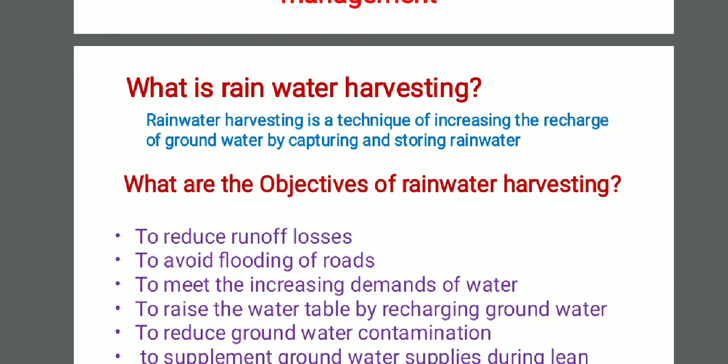Shall we proceed? Okay, first one, rainwater harvesting. This is a very important water harvesting technique. This method was practiced even 1000 years before. People used to collect the rainwater from the rooftop and stored this water in tanks.

Whenever they needed water, this rainwater was used for their purpose. You know, many places across the country receive abundant rainfall during rainy season, but they face water scarcity during the summer season.

Why? What is the problem for this? This is due to the poor rainwater management system. Unless and otherwise we properly manage the rainwater, the water scarcity problem could not be eliminated or reduced.

So this method is very important. Rainwater harvesting is very important to recharge the groundwater, because groundwater is used for many purposes: drinking purpose, irrigation purpose, industrial applications. All those works need groundwater. So this groundwater has to be recharged only through rainwater. If we establish rainwater harvesting structures, the groundwater would be effectively recharged and water scarcity problems could be minimized.

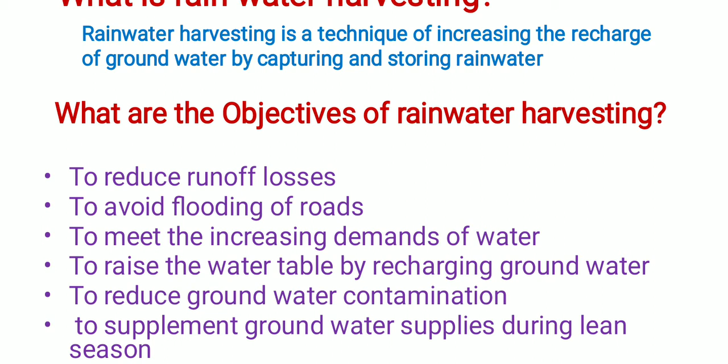Second objective, to avoid flooding of roads. Yes, you would have seen during rainy season water accumulated on the roads. This is due to poor infiltration capacity of the roads. Heavy vehicles moving on the road cause the soil to get compacted, so it has poor infiltration capacity, and water accumulates on the roads. That will disturb our routine.

When we do the rainwater harvesting, these problems can be minimized to meet the increasing demands of water. Yes, when we store the rainwater in overhead tanks or underground tanks, during water scarcity times this water can be used for our purpose.

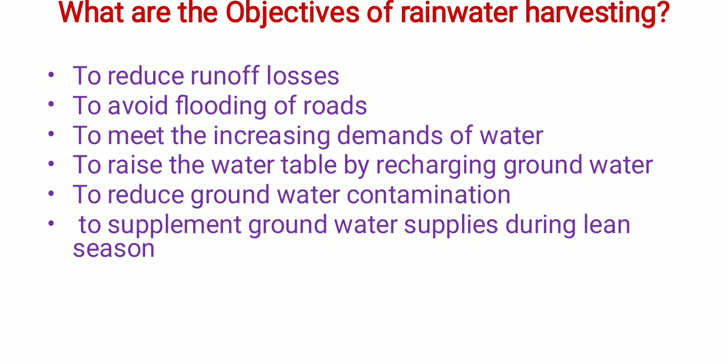Next, to raise the water table by recharging the groundwater - I have already explained this point, I don't want to tell it again. And to reduce groundwater contamination: yes, at the source itself we collect the rainwater. Rainwater is the purest form of water. When we collect it and make it infiltrate into the soil, groundwater pollution is minimized.

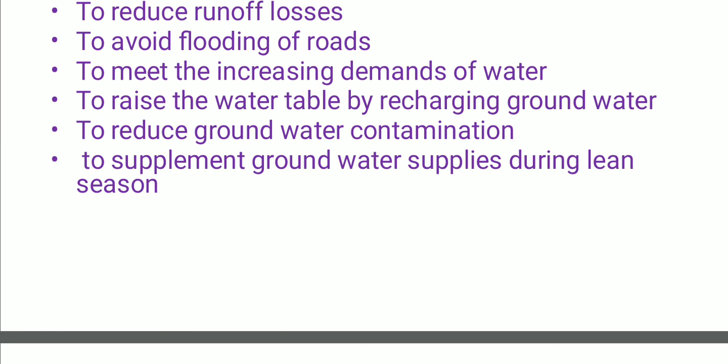When rainwater is allowed to flow over the surface, it will carry some pollutants. If we collect the purest water from the rooftop and directly pass this water into the soil, the pollution of groundwater can be reduced. To supplement the groundwater supplies during lean season, it can be used as a supplement. So these are the rainwater harvesting techniques.

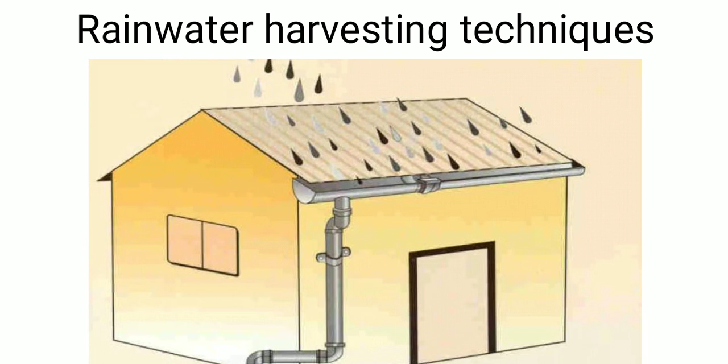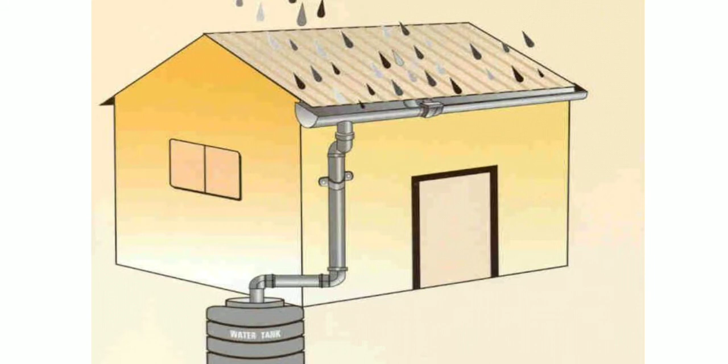So here, the rooftop water from the rooftop is collected and stored in the tank. Whenever we need water, or during water scarcity times, this water can be used. This is one of the methods.

Compared to this, the second method is widely practiced. Here, a portion of the water from the rooftop is diverted to the abandoned well, and another portion is diverted to rainwater harvesting structures. It is used to recharge the groundwater.

I know in 2006 or 7, the government of Tamil Nadu passed an order stating that all housing units, including commercial buildings, have to establish rainwater harvesting structures. If it is not established, the electricity supply and the water supply should be cut.

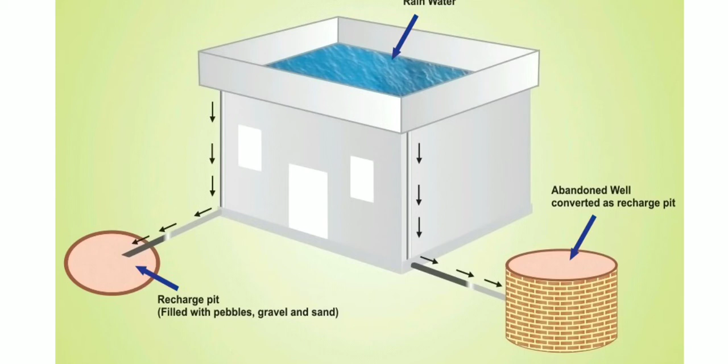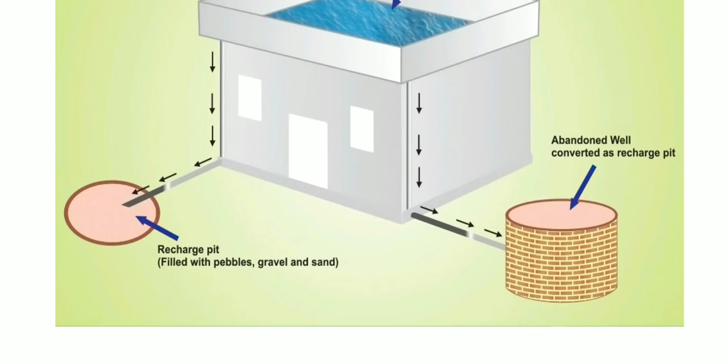So after this order, these rainwater harvesting structures have slowly been established by some commercial buildings, and even by many households.

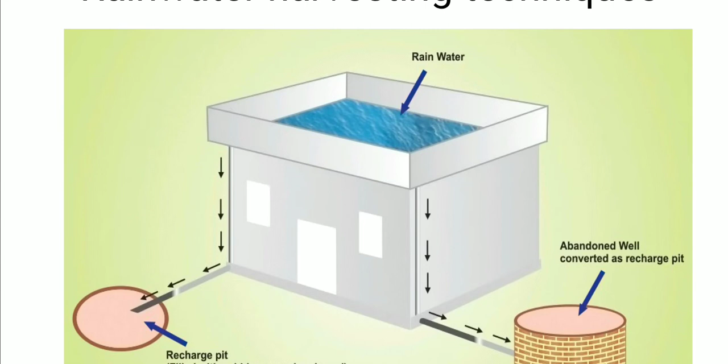So what must we do? My request is that everyone should concentrate on establishing a rainwater harvesting structure in your home. This would definitely help save our environment and reduce or eradicate water scarcity problems.

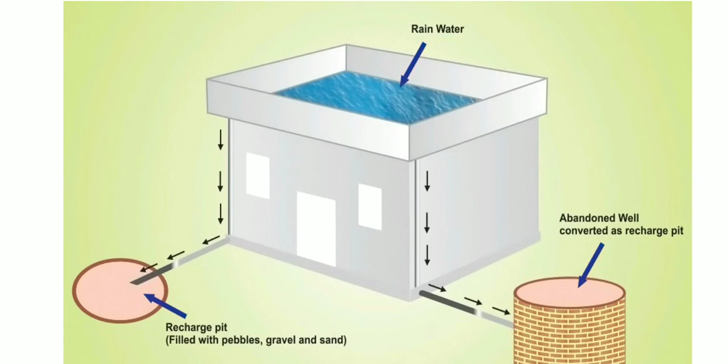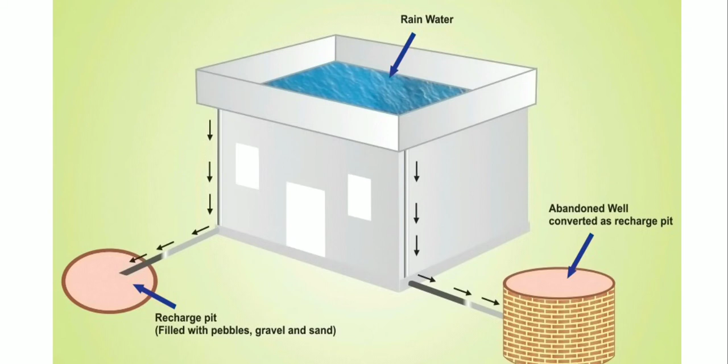We youngsters must do this practice. When you do so, the elder people would see your practice, and they would themselves establish these kinds of structures in their homes. Would you do it? I hope you will do this practice.

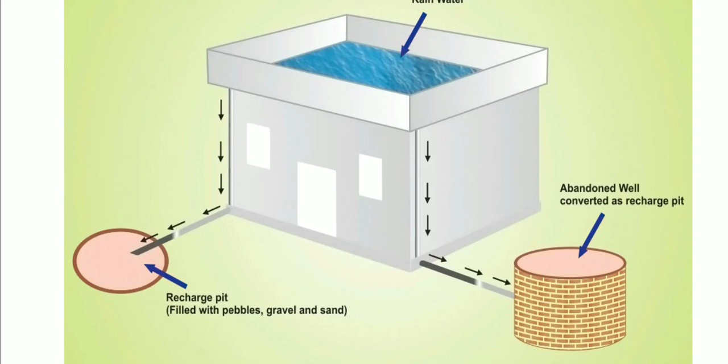Next one is watershed management. Watershed is another water harvest conservation practice. What is watershed? It means how rivers are formed - many streams join together and some rivers are formed. These rivers flow from the mountain and ultimately join the ocean.

It travels a long distance. The watershed is the entire area of all channels through which water flows - that is called watershed. The exact definition: the land area from which water drains under gravity to a common drainage channel. Thus, a watershed is a delineated area with a well-defined topographic boundary and one water outlet.

Whenever I use the word watershed, you should think of dam construction - the benefits of dams. Watershed can range from a few square kilometers to a few thousand square kilometers in size. In a watershed, the hydrological conditions are such that water becomes concentrated within a particular location, like a river or streams.

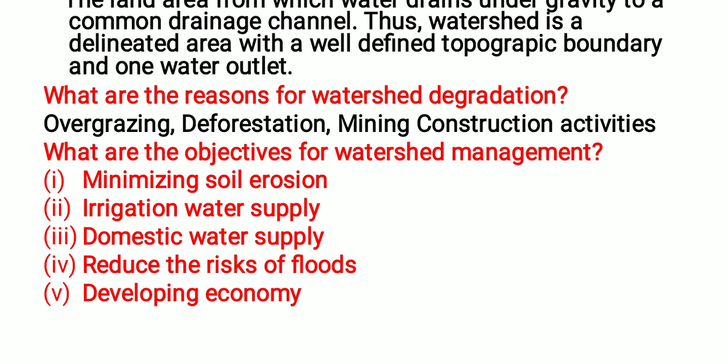Irrigation water supply - the dam provides irrigation water supply to many farming areas, so in order to provide irrigation water supply, this watershed has to be managed. Domestic water supply and drinking water supply are also obtained from water received from the watershed.

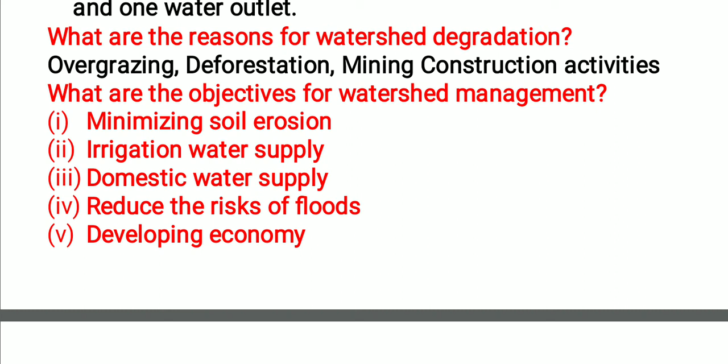Next, reducing the risks of flood - if we construct check dams or big dams, they reduce floods during the rainy season. And developing the economy - if water is available in plenty in the dams, there will be growth in the agricultural sector, so ultimately the nation's economy would be developed.

And what are the practices used to manage the watersheds? First, water harvesting. Proper storage of water is done with a provision for use in dry seasons in low rainfall areas. It also helps in moderation of floods. We've already discussed these points during the rainwater harvesting topic.

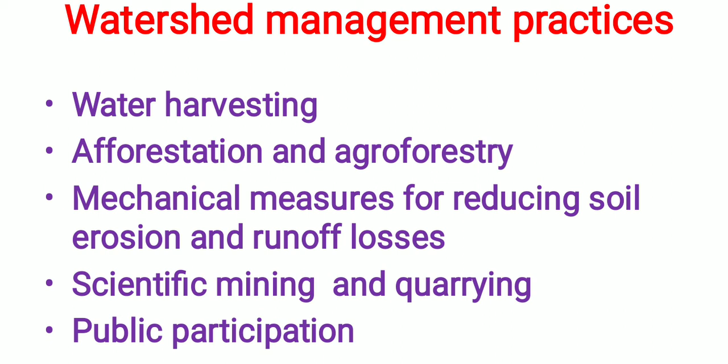Afforestation and agroforestry: in watershed development, afforestation and crop plantation play a very important role. They help prevent soil erosion and retention of moisture. During high rainfall, trees prevent the runoff of water, and the infiltration of this runoff water into the soil is increased if we do afforestation and agroforestry.

Mechanical measures for reducing soil erosion and runoff losses. Some mechanical measures we discussed while covering food resources: construction of terracing, methods of harvesting, and methods of planting crops. Instead of cultivating along the tops and bottoms, cultivation is done across the slopes, which reduces runoff losses.

Scientific mining and quarrying: due to improper mining, hills lose stability and get disturbed, leading to landslides, rapid erosion, etc. Contour trenching at an interval of 1 meter on overburdened areas has to be constructed.

Another method is public participation. Without public participation, you cannot implement any scheme successfully. If you create awareness among the people, the project would definitely be successful. The people's involvement, including farmers and tribals, is key to the success of any watershed management program. This is very important.

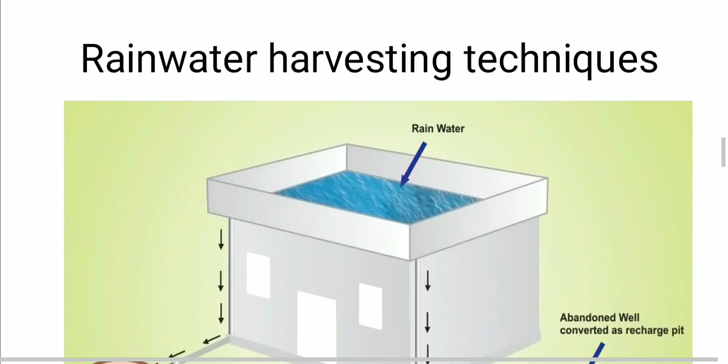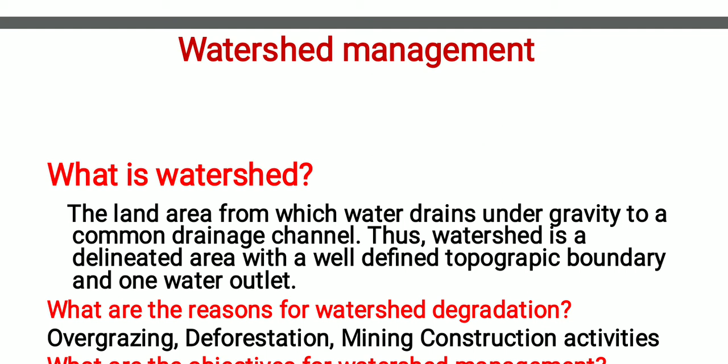Rainwater harvesting and watershed management: in the university examinations, one of these two questions is routinely asked. Any one of the two questions would be asked. I hope so, so you must study well.

Now we are going to discuss the resettlement and rehabilitation policy. What is resettlement? Various development projects often lead to displacement of native or tribal people who are poor and very often not educated. Their rehabilitation is a major economic issue. So what are the problems? Why do we migrate or shift people from their native place to another place? What are the reasons? Tell me one by one.

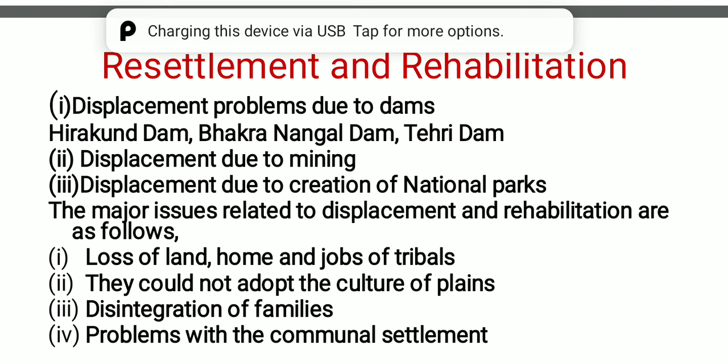The first one: displacement problems due to dams. People are forcibly shifted from their native place during dam construction. For example, the Hirakud Dam - during its construction, more than 20,000 people were shifted from their native place. Where is the Hirakud Dam situated?

Hirakud Dam was built across which river? It was built across the Mahanadi river, not Hirakund - that N is incorrect. Hirakud Dam is built across the river Mahanadi, about 15 kilometers from Sambalpur in the state of Odisha, India. I would like to share a few points about this dam: it is 55 kilometers long.

It is one of the major multi-purpose dams constructed after independence. It's called India's longest dam because it spreads nearly 55 kilometers - imagine that. Another dam, the Tehri Dam, was constructed across the river Bhagirathi. When this dam was constructed, a large number of people were shifted.

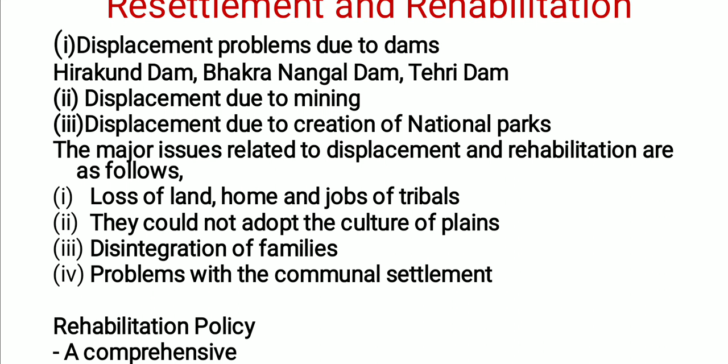So the cheated people entered into the forest and constructed huts and dug wells, causing a violent encounter with the forest officials, ultimately causing injuries and deaths to the people.

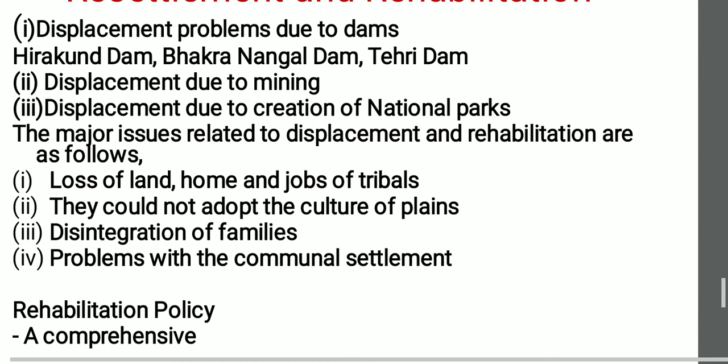Major issues related to displacement and rehabilitation: what are the major issues? Loss of land, home, and jobs of tribals that we have discussed earlier, and they could not adopt the culture of the plains because the tribal people are adapted to the hills.

All are hills oriented - their aesthetic values, their culture, their food habits, everything depend on hills. When they are shifted to the plains, they could not adapt to the culture that persists there.

They are struggling, and there is disintegration of families - some of their relatives would be living in the forest area while only the people from the places where the dam was constructed were shifted to the plains. So there is a communication gap between the relatives and families, and they would be struggling.

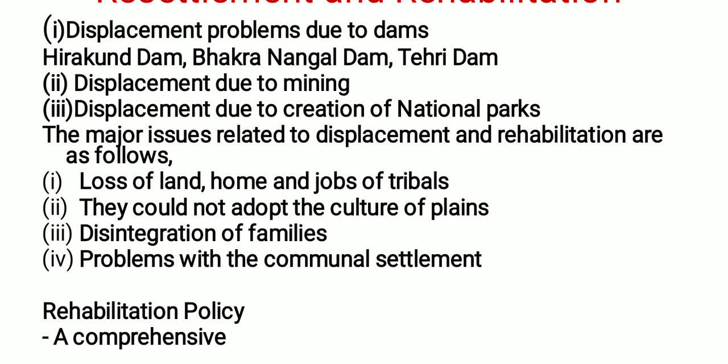And problems with the communal settlement. Another one is the rehabilitation policy.

There is a need for a comprehensive national rehabilitation policy. Every state government follows a certain rehabilitation policy - one government says if 1 acre of land was lost in the dam construction area, 1.5 acres would be provided in the plains. Some governments give assurance of only 0.5 acres in the plains.

These differences make the people agonized, make the people feel cheated, and they do some destructive activities. So we need a comprehensive national rehabilitation policy in order to mitigate these problems.